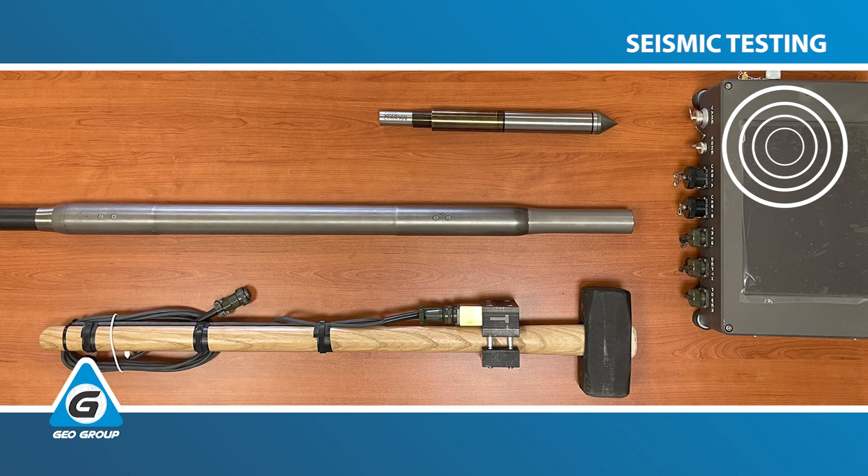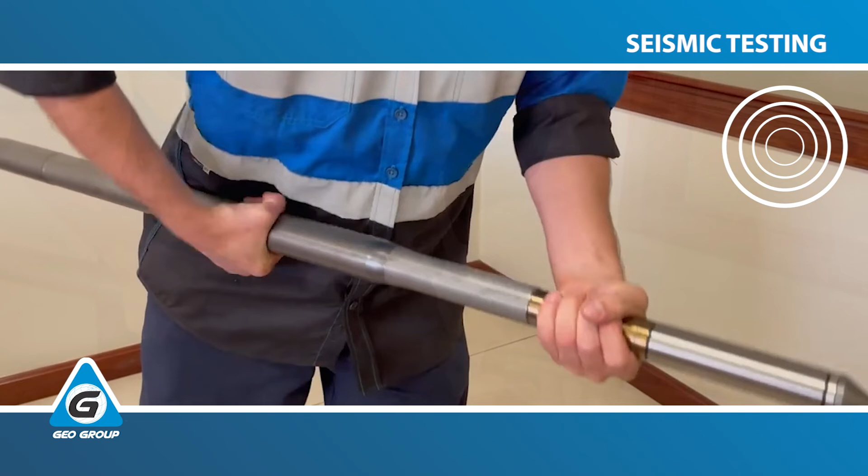So how this works is you slot the piezo cone into the seismic module, and then that is the assembly of the seismic piezo cone. So what this allows us to do is you can do normal CPTU testing, which measures your QC, FS and U2 values. You can do dissipation tests and then your seismic testing.